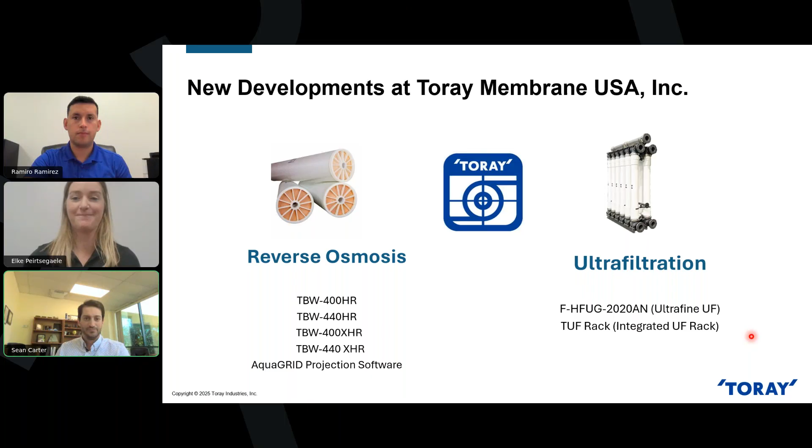As Sean mentioned, we're going to be primarily focusing on RO membranes today and the development that we've made in the technology here at Toray.

To kick things off, it makes sense to show what a traditional polyamide RO membrane looks like. Here on the screen, we have a cross-sectional SEM image of a polyamide RO membrane. You can see the 3 layers in the membrane. At the very top, you can see this very thin layer, and that is the cross-linked aromatic polyamide chemistry.

That layer is actually referred to as the barrier layer or the separation functional layer, and essentially it is responsible for rejecting the dissolved solids that are present in a feed water. So that is the membrane that is doing the rejecting.

That sits on a polysulfone support layer or inner layer, and that polysulfone layer is microporous and essentially serves as a support layer for that thin polyamide layer at the top. Then that sits on a non-woven polyester fabric, which is the thickest of the 3 layers, and that is known as the substrate that the membrane is cast on. That substrate basically provides the mechanical strength and durability for the membrane.

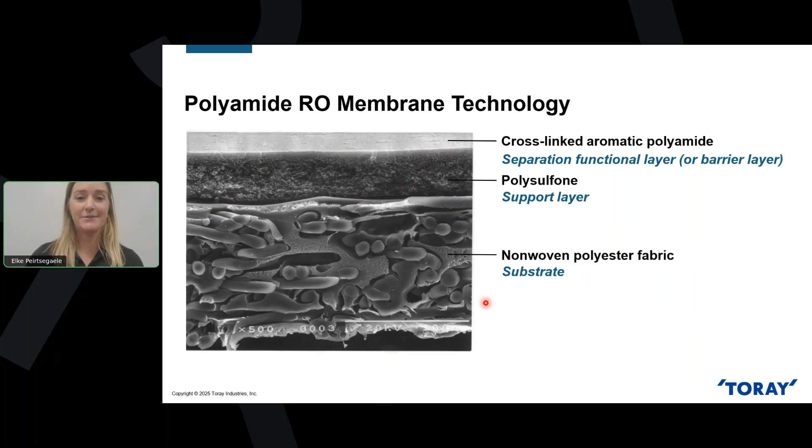So that's what a traditional membrane looks like. Now we'll talk about the things that we're looking for in an RO membrane as they're used widely to treat surface waters, wastewaters, etc.

When it comes to RO, we're always looking for a membrane that has reduced energy consumption, right? We want to lower that OPEX. We want a membrane that produces high quality permeate, right? We want to meet those permeate quality requirements. We want a membrane that's anti-fouling, and then we also want a membrane that has high durability.

Today we're going to focus on the first 2 here. We're going to look at how we can reduce the energy consumption of a membrane. In order to do that, we need to have a membrane that has higher flux or higher water permeability. One of the things we can look at in the membrane chemistry to achieve higher flux is the protuberance structure, and we'll get into that.

And then when we're looking at creating a high quality water permeate stream, we want to create a membrane with higher rejection. In order to achieve that higher rejection, we want to look at the pore structure within the membrane chemistry. So we're going to dive into those in a bit more detail here.

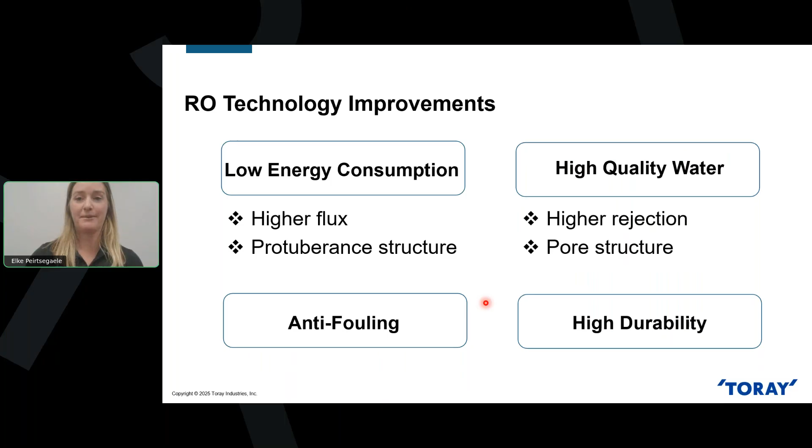As I mentioned, we're looking for a membrane that has both high salt rejection characteristics as well as high water permeability. In this graph, we're striving for this magic corner up in the top right, where we want a membrane that has high rejection, high flow. Traditionally, we've had to balance between the two characteristics.

Typically when you have a membrane with higher salt rejection, that permeate flow drops off, and vice versa is also true. When you have a low energy membrane, that permeate flow is higher, but that rejection comes down a bit. That's represented by this blue diagonal line here. So we're striving to get to this magic corner.

So how do we do that? On the right-hand side, we have a diagram showing the theoretical concept behind the membrane. On the left-hand side is what an RO membrane looks like today. These black lines represent the polymer chains, and you can see there's cross-linking there, but also some imperfections within that chemistry, and that creates these voids or pores.

For those charged ions present in the feed water, those get rejected pretty well by an RO membrane because that polyamide surface typically has that negative charge. But for neutral molecules like boron, silica, urea, those can pass through some of these voids. In order to improve the rejection of those neutral molecules, we need to look at that polymer cross-linking, improve that, and create more uniform, smaller pores to remove those voids. That's what's being depicted on the right here.

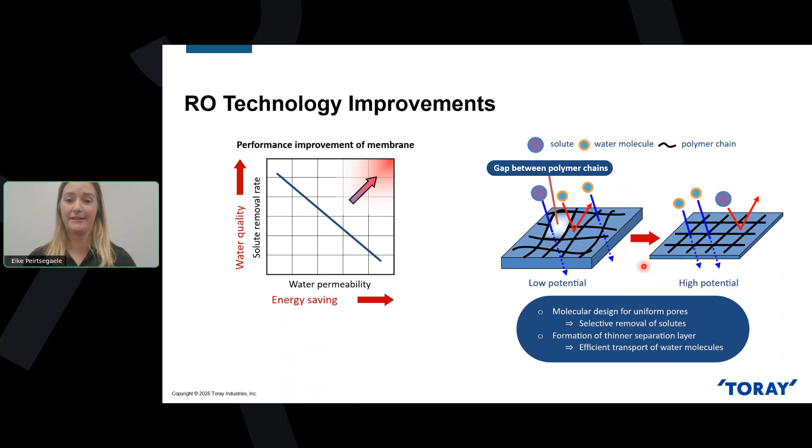Another thing we need to look at is how the structure of the membrane surface itself leads to water permeability. We'll look at that as well.

Going back to this SEM image that we showed at the beginning of the presentation, we're going to zoom in on that polyamide layer and see what we can do to get closer to developing a membrane with higher rejection as well as higher flow.

If we take an SEM image of the surface of the membrane, looking down at the surface of the polyamide membrane, you can see there's a lot of these that look like bubbles. These are the peaks and valleys of the surface, and each one of those peaks is known as a protuberance.

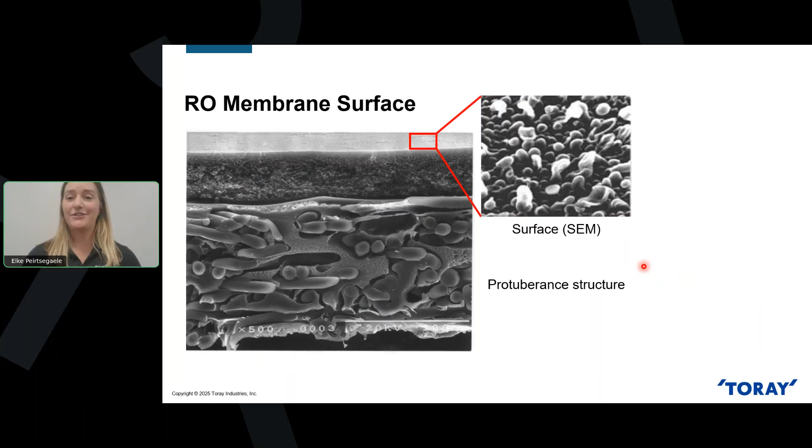We can also take a cross section of those protuberant structures, and we can see again the surface of the membrane has these ups and downs, the peaks and valleys, and we're going to see how these structures impact permeability as well as rejection.

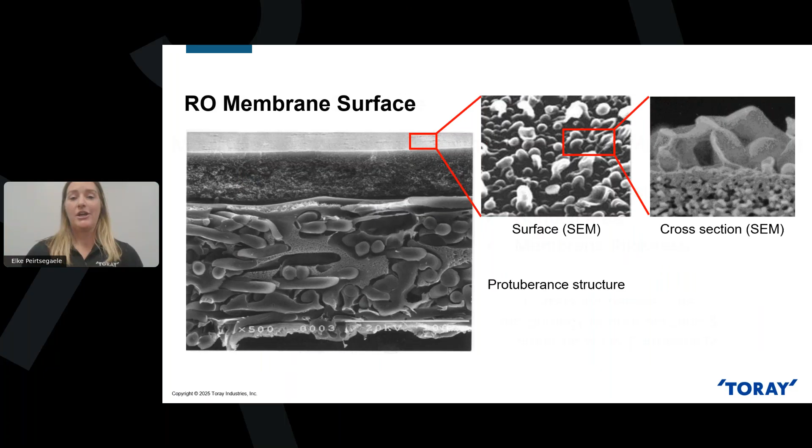By taking some TEM images, we can look closer at the protuberant structure and take some measurements. We can look at the surface area of each of the protuberants to understand how much surface area is at the membrane surface. We can also measure the thickness of this protuberance - you can see it's a little thinner here at the top, and then it gets a little thicker here at the bottom, so not super uniform.

If we measure these two things, the surface area and the thickness, we can potentially see what impact that has on permeability through the membrane.

We can see that relationship in this formula here - a diagram of that protuberance - and you can see that flux is proportional to surface area over thickness. So if we can increase that surface area at the membrane surface and make that protuberance thickness more uniform, we can essentially increase that membrane flux.

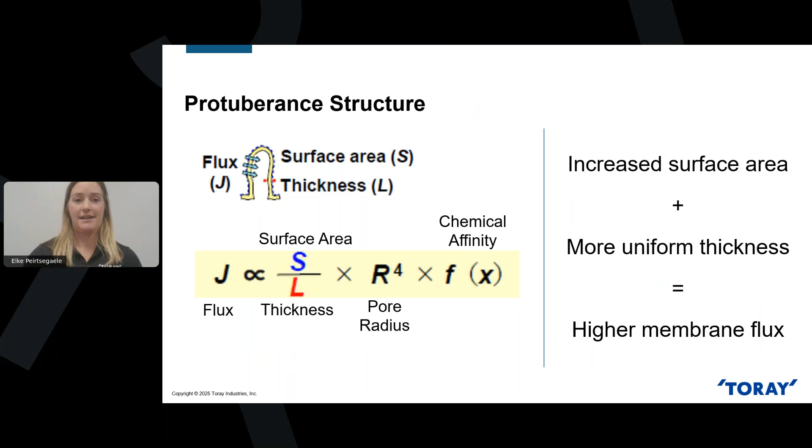So that is exactly what we set out to do. The first part was getting that data - we have a bunch of really expensive microscopes that allow us to take all these really cool images.

On the left-hand side, we have a 3D image of this protuberance, and it allows us to measure the surface area and look at the thickness of the walls of that peak. You can see this thickness isn't uniform - you've got a thinner wall here, but it's thicker over here, and that can lend to discrepancies in flux when looking at that specific protuberance structure.

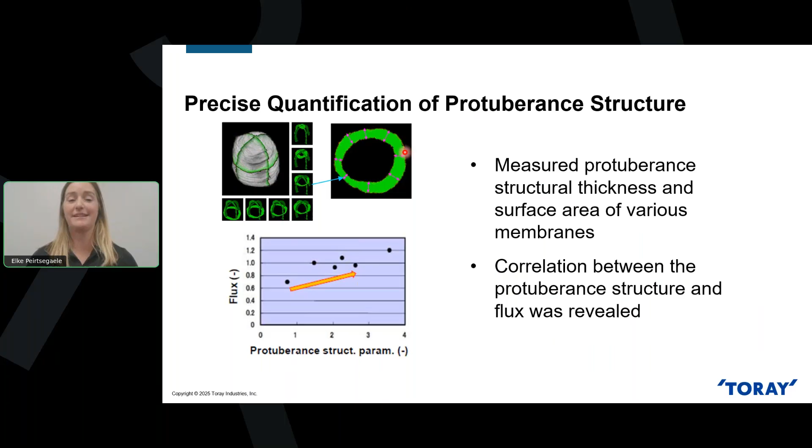By taking all these measurements, we actually realized that the surface area and the thickness of these structures does correlate to membrane flux.

So now it comes to how do we tailor that structure so that we can achieve that higher membrane flux. On the left-hand side is an image of a conventional membrane, and you can see that protuberance height on average. With the new membrane chemistry we've developed, you can see that protuberance height is much greater, and by increasing that height of these structures, we are increasing the surface area of the membrane, which as we saw in that formula, increases the permeability through the membrane.

Another thing is looking at the thickness of each of those protuberant structures. The conventional is in purple here, and you can see the distribution of thickness is quite wide - there's a lot of variance in the wall thickness. If we can hone in and get more refined on that distribution of thickness, we can get a more uniform structure, and that will also help us increase the flux through the membrane.

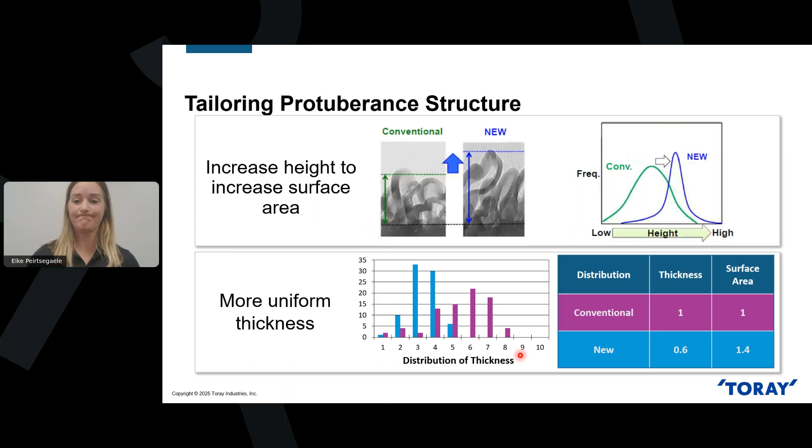So that is exactly what we've done. We've talked about the permeability of the membrane and improving that, but we also need to talk about how you improve rejection, specifically of these neutral molecules that slip through these voids in the polymer chain or the cross-linking. Again, here's an SEM image of a conventional RO membrane.

That's where those neutral molecules like boron, silica, and urea will pass through those voids. So how can we improve this? How can we essentially ensure that those voids are gone? We can improve the cross-linking.

If we improve the cross-linking to create uniform, small pores throughout the surface of the membrane, we can reduce the amount of large pores that are present, and that will improve the rejection of those neutral molecules.

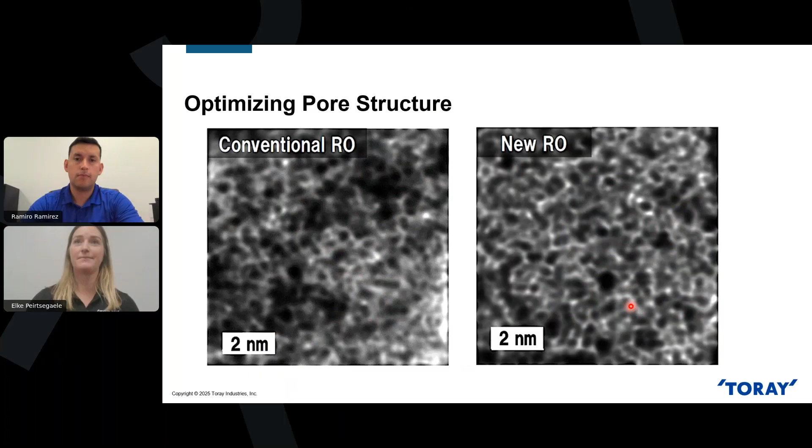Yeah, thank you for that detailed explanation of the technology, and I want everyone on the call to keep that in mind. We're going to talk about the real life application and introduce the TBW membrane, but just keep in mind that comes through a lot of efforts and actual improvements in the technology as described by Elke.

So what's the importance? What's the sense of urgency in improving the technology? And that's because the market demands it. For us, we've had improvements over the years in the removal of dissolved ions, something we do very successfully, but the passage of neutral molecules is ever pressing with water scarcity and just in the spirit of optimizing technologies.

It's incredibly important. So some of the most common neutral molecules that we're going to be discussing, and that we see the need for efficient removal of, are silica, boron, urea, and PFAS, which I'll explain towards the end of the presentation. So one of the origin stories, so to speak, for this new membrane is the ultra pure water market.

Semiconductors, we all use them, right? They've become a core product of society today, and it's a very, very high efficiency process. If anyone here has ever been to one of these facilities, you'll be amazed by the level of detail and the redundancy they require to basically achieve the most pure water possible. That's what they're trying to achieve. So they're stretching really the theoretical limits for ultra pure water.

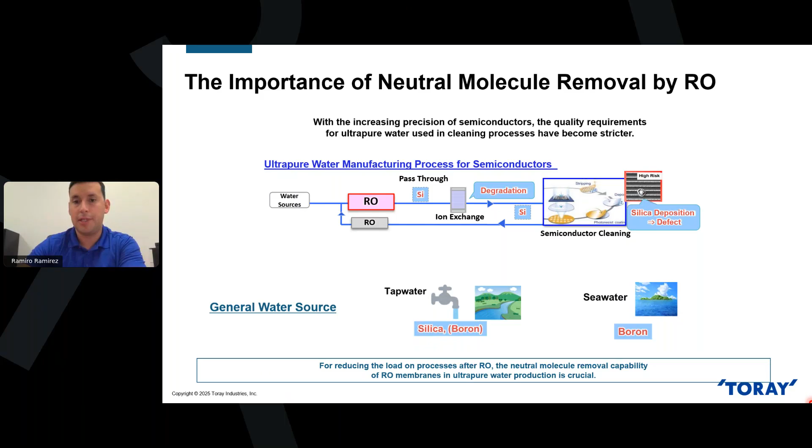So oftentimes, these high-pressure steam turbines are monitoring for silica consistently and trying to achieve levels below 5 to 10 parts per billion. Typically, you have an RO system that's going to be doing a bulk of the work, and then you would pass that through some kind of polishing step, whether that be a resin, lead lag, EDI or CDI technologies, and extending the regen frequency is really important.

So these resin systems, for example, will typically break through on silica. So they'll monitor the conductivity, they'll monitor the silica, and as silica is easier to pass through RO, it's actually easier to pass through resin as well. So oftentimes they'll be monitoring the concentration of silica, and when they reach a certain level, 5 to 10 parts per billion, is when they'll have to trigger a regen. So the more we can take out with the RO, the more risk you're managing, and you're also going to get that investment back in reduced regen requirements.

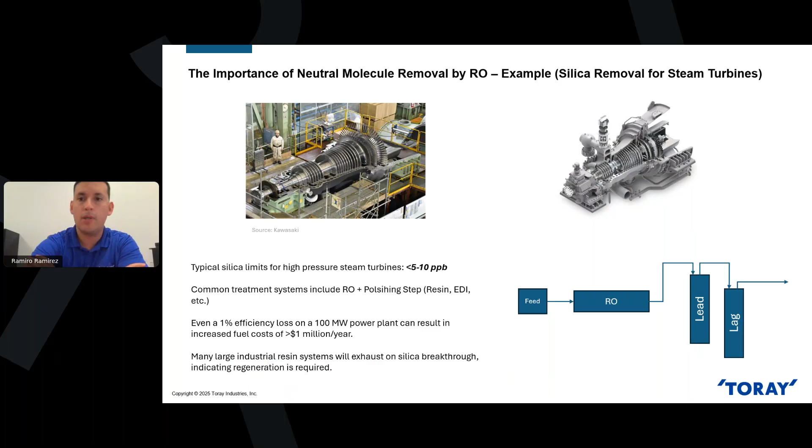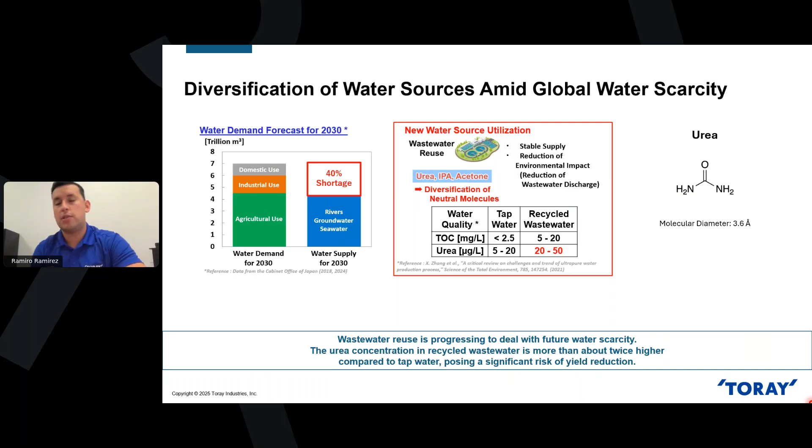So urea is another constituent of concern. You can get it from natural processes, from agricultural runoff. It can leach into the groundwater, and the molecule itself, again, is neutral, and it's very small in diameter. It's not that much larger than water. So as Elke was explaining, any imperfections or gaps in the cross-linking are opportunities for that urea to come in. So we want to make sure that we're optimized to remove as much urea as possible, especially these days as we're approaching more and more water reuse projects. So again, we just want to reiterate the need and the urgency to optimize that system.

So the technology that Elke explained at the beginning of the presentation has a name. That is the new TBW series. We're very excited as a company to be releasing these products. These products are officially available for release, so you can contact myself, Elke, Sean, or your local Toray rep, and we're happy to provide you information on the membrane. You can download these data sheets on our website.

So if we take a closer look, we have two membranes available in that product category. We have the one on the left, which is the TBW HR, and the one on the right, TBW XHR. I'll explain the differences here in a bit. These are available in 400 and 440 square foot versions. The one on the left, you'll see the test conditions resemble more a low energy brackish membrane.

And the one on the right, we're at a test condition of 290 PSI for single element wet tests. So it's a little bit elevated, not quite in between a brackish and a seawater, but certainly filling that space. So again, when it comes to membrane selection, are we trying to take advantage of a low energy or a high rejection? We can balance that case by case to figure out if the HR or the XHR is a more appropriate membrane for that particular job.

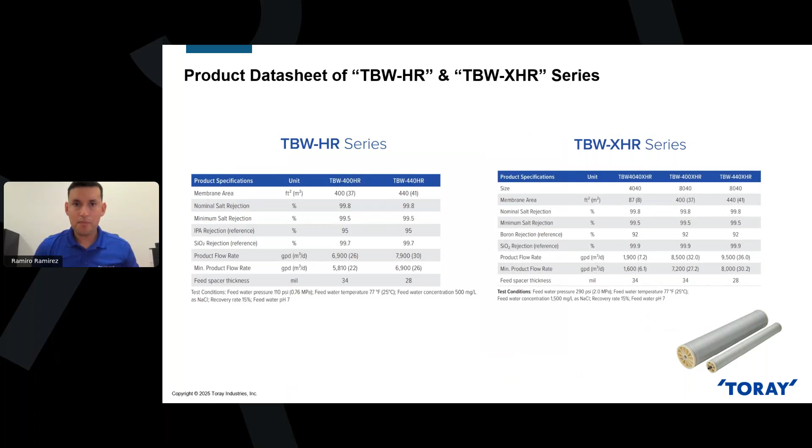For anyone here who's worked in the membrane space, you may have seen a chart like this. This is a chart showing the difference of the A and B values. There's a lot to go over here, so we'll take it step by step. Just as a refresher, the A value, plotted on the x-axis, is the water mass transfer coefficient. This defines the rate of water transferred through the membrane. Generally speaking, you want a high A value, towards the right of that graph. That means you're able to achieve a specific water flux at a lower operating pressure.

Plotted on the y-axis, you have the B value, which is the salt mass transfer coefficient, and this is the rate of salt diffusion through the membrane. Again, generally speaking, the further you go down on that graph, the better salt rejection you're going to achieve. So in a perfect world, you're going to generate a membrane that's at the bottom and the right side of that graph. We have 4 elements plotted here.

If we focus on the 2 on the right, the element plotted in the orange line is the TBW 400HR, which again is at those lower pressure conditions. Right next to that in the gray is the TM720D 400. For those familiar with the Toray membrane nomenclature, that's our high rejection brackish element, which has been a flagship element for Toray, something we're very proud of, with thousands of successful applications worldwide.

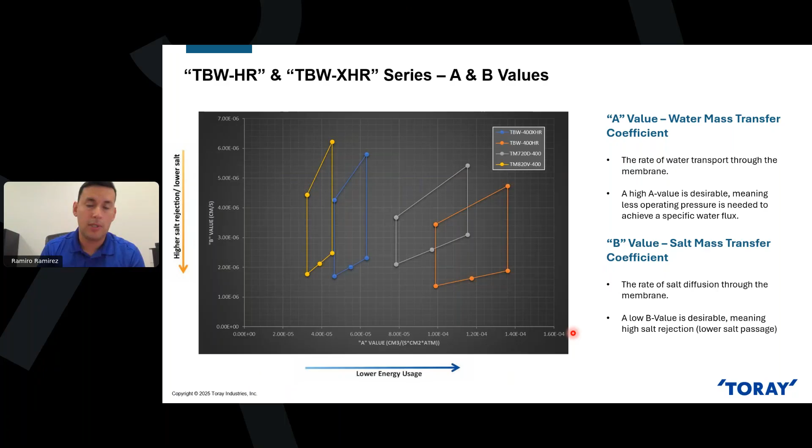So if we take a look at the published information, to no surprise, the collective efforts of the Toray R&D team have paid off, right? So looking at this here, we're looking at the boron rejection of a conventional membrane, as opposed to the new ones that we're generating. So this one here is specific to boron. The test conditions in this particular example are a little bit different than the ones published on the data sheet, so we can go through those details case by case with your local Toray rep.

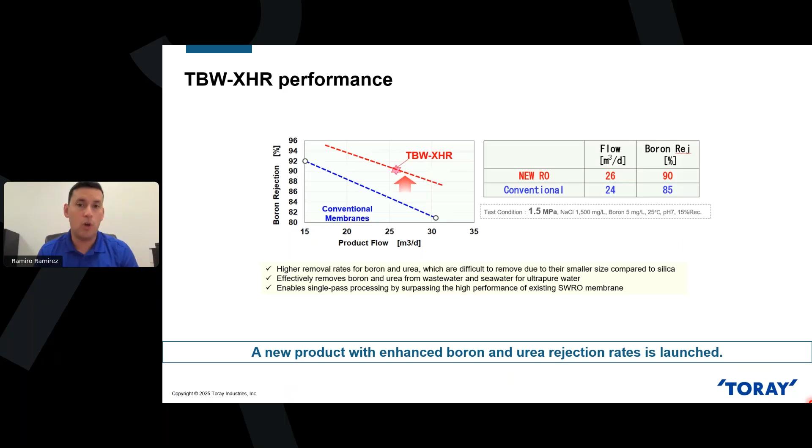But the difference of 5% here in this particular example may not seem like quite a bit, but at this point we're talking orders of magnitude difference in what you're projecting in your permeate. So depending case by case, in certain areas where you may have been expected to do a double pass system or get creative, we are opening the door to potentially getting away with a single pass or maybe not dosing as much caustic in the second pass. There's a lot of different groups here that we can explore case by case, that we can open up with these new membranes.

Just following this trend here, looking at a couple different examples. So here on the left, you can see the difference in salt rejection, a conventional membrane in the blue line versus what we're able to achieve with the new series of membranes. On the right, we're seeing a silica rejection value. So for the XHR, a nominal rejection for silica is 99.9%, which is significant. Like I said, it may not seem like a big leap from 99.7, but when you actually pencil out the calculations and take a look at your projections, the improvements are notable and exciting.

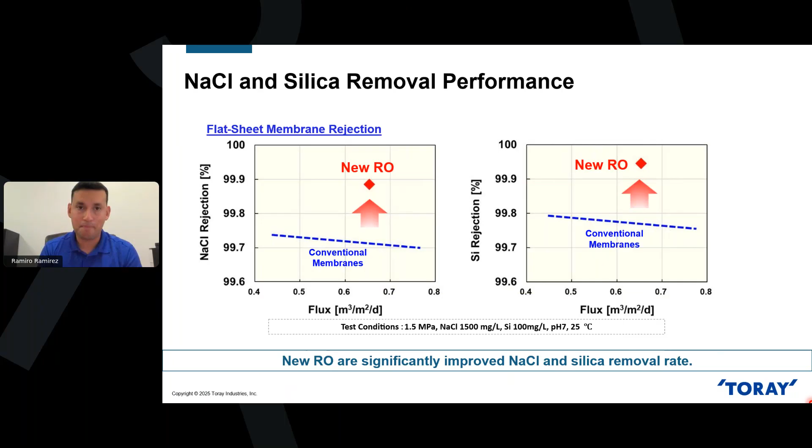Just going through a couple other ones here. So we talked about boron and urea and how difficult they are to remove for the size of the molecule and for the fact that it's neutral. So again, this is just to demonstrate the data that we've acquired with these new membranes and how they compare to what we're used to seeing on the conventional side.

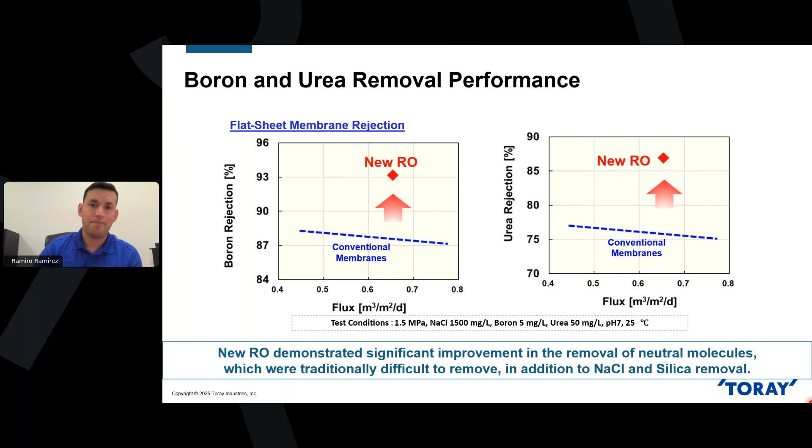Again, just wrapping up a couple of those here. So acetone and IPA. Acetone is not something you likely want to introduce in your system, but it's a good indication and what we use as a benchmark for the removal efficiency of neutral molecules at varying molecular weights and molecular sizes. So again, the trend we're seeing here is improvement across the board. It can vary depending on which constituent you're trying to remove, but again, Elke's explanation is so important because it's providing a technical background as to why we're seeing these new values and an explanation as to how we're able to achieve these improved rejections.

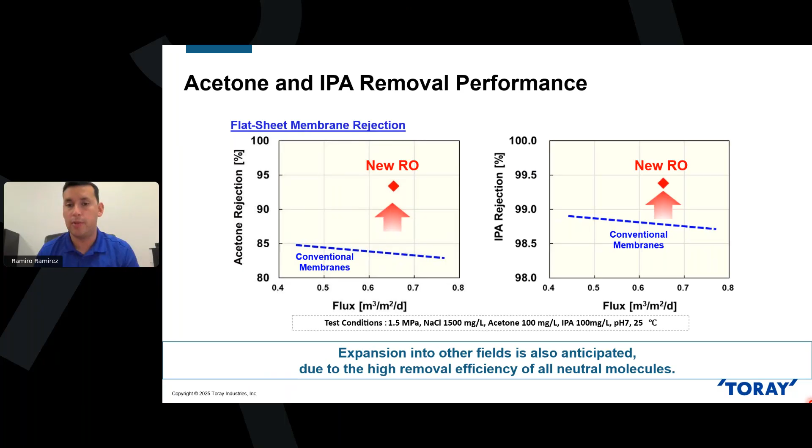One other important thing that we want to chat about here is PFAS as well. So PFAS, I'm sure everyone here on the call has come across the term. Can you go back just 2 slides? One second here. Just want to go back.

There we go. So PFAS is per- and polyfluoroalkyl substances. PFAS is the blanket term. Many of you might know them as forever chemicals. These are chemicals that have been in production since the 1940s. We've all taken advantage of these chemicals through nonstick pans and the materials to make your clothes waterproof. They've been used in military applications across the board. And as of the past couple of years, we're unfortunately coming to terms with the fact that these are persistent and have been linked to a wide array of health consequences for humans, right?

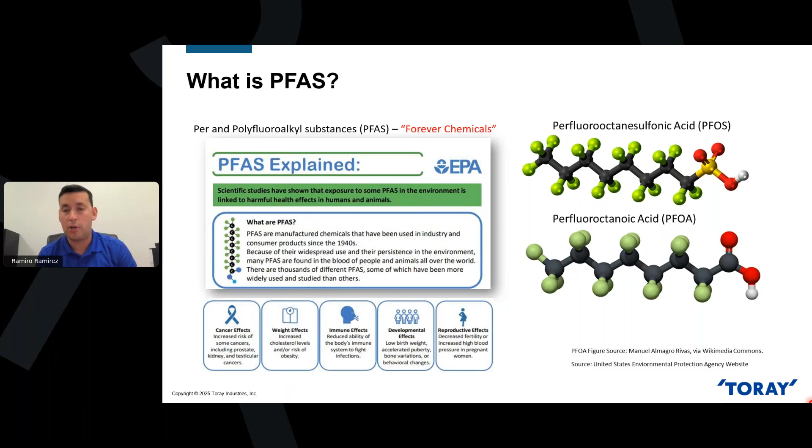So to say that they're a constituent of concern is old news. We've been struggling with the removal of these. It's kind of tricky, right? Because it's not a one size fits all. There's different families. If you see in this diagram, based on the amount of carbon chains, they can vary in length. There's the PFOS, which typically has a sulfonic acid functional group. And you'll see the ones on the bottom, PFOA, which use carbon chains, and then they'll have a carboxylic acid group. So they'll vary based on size. The functional groups and the surface charge are different based on which one you're looking at. So the removal of these has been historically challenging.

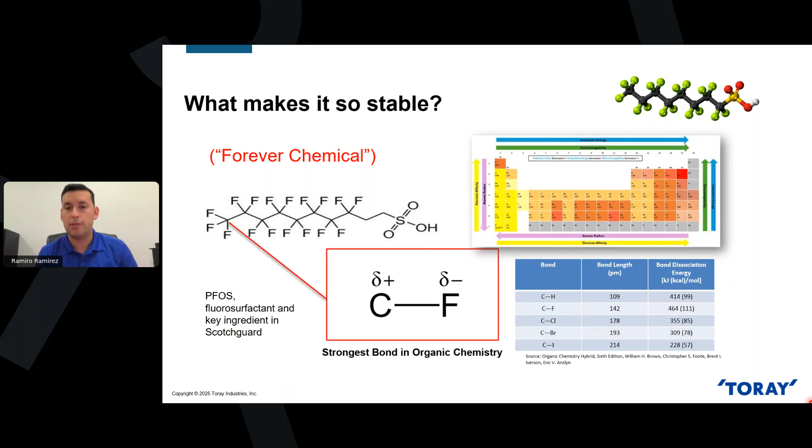Again, a little bit more background on PFAS. They make use of a carbon-fluorine chain, which is the strongest bond in organic chemistry. So to be able to just destroy them in water or degrade them is not particularly trivial. They're incredibly difficult to break down. So our tactic is to effectively use reverse osmosis to concentrate that, minimize it, put that all in a bucket, and then deal with that concentrated solution more effectively.

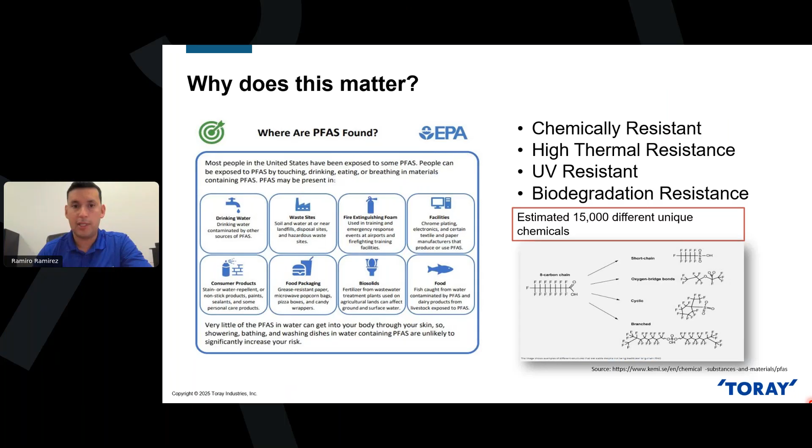Really that uniformity that we're able to achieve in the TBW series is going to be able to more effectively, non-selectively remove these constituents from a water source. Again, if we take a look at the different categories of chemicals here, we'll notice that they're all of different molecular weights. So with us being able to produce a membrane that is more consistent in the level of cross-linking, better at rejecting PFAS components of all molecular sizes, we're able to more confidently, more accurately, and more efficiently remove these families of products.

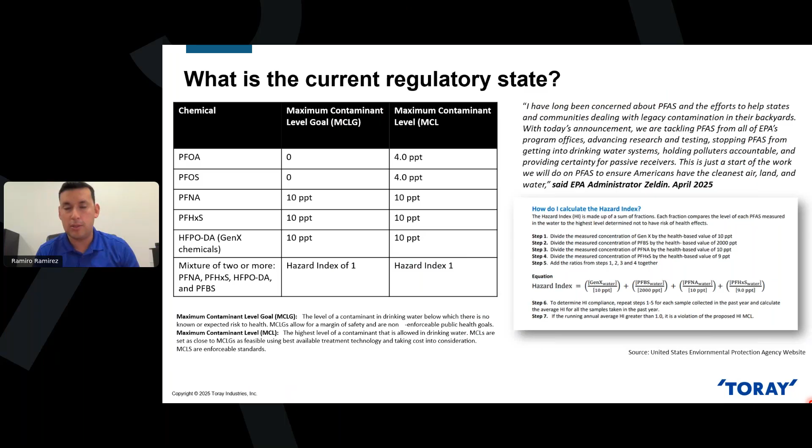But needless to say, the EPA has released these guidelines. We're talking part per trillion levels at this point. There are requirements to monitor and test for PFAS in potable water sources. And any sites that are seeing elevated levels of PFAS are going to be required to incorporate some kind of technology to get these below the MCLs, and those timelines have been established. So the time is now. It's not something that we're speculating at this point. There are actual regulations that have taken place. So we can expect to see these projects come to fruition in the coming months and years.

As far as technologies that we have to deal with PFAS, we have granular activated carbon, GAC, we have ion exchange, and we have reverse osmosis as 3 common ones. Each of them, in my opinion, has a pro and a con, depending on what type of water you're trying to achieve, the flow rates. Do you have long chain? Do you have short chain? You might use any one of these technologies or any combination. GAC is typically pretty effective at large flow rates, but it might be challenging to dispose of once you saturate it with PFAS. It's also effective at removal of certain chain sizes more than others. Ion exchange has a nice removal capacity, but it's an expensive product to produce.

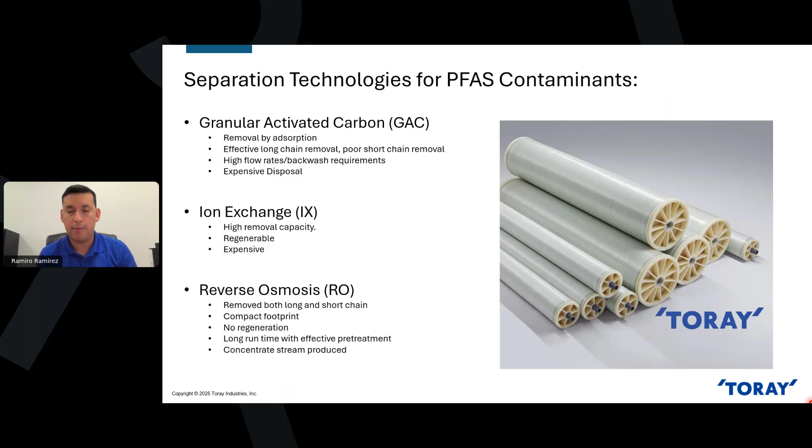RO, which is what we can speak to with a little more clarity, is very effective at both long and short chain removal. It was so before, and it is even more so now with the new technology. It has a compact footprint, no regeneration, but you do have to find a solution for the brine stream, the concentrate stream. That's historically been a little bit challenging with a standard UF/RO system. Very effective at removal, very effective at concentrating. So if you're operating at a very high recovery, you can funnel all that PFAS and concentrate it into as concentrated a reject stream as you can achieve. But the question remains what to do with that stream.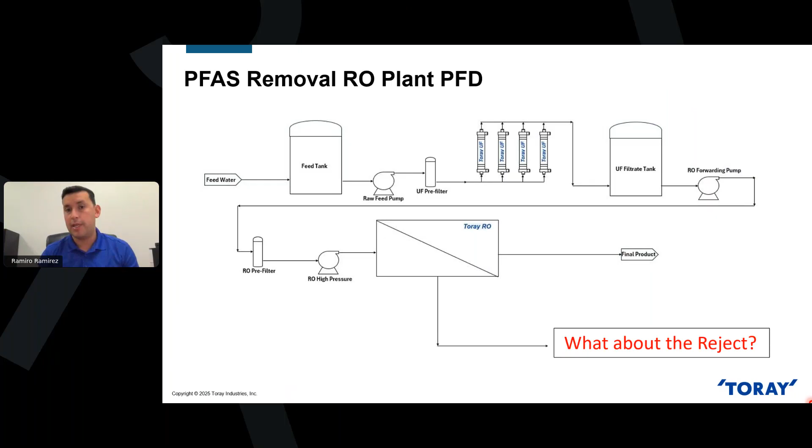So again, this is a very high level overview. If any of you have specific projects or want to talk about these concepts in more detail, we're happy to, but there are a myriad of different technologies that we can utilize to dispose of that. That has historically been a challenge, but we do have avenues for that, and making use of a TBW style membrane, you're going to be able to further improve the concentration of that and generally just optimize your system.

So the last thing I wanted to touch on before we end the webinar is our AquaGrid software. This is our new version of the Toray membrane projection software, which is available to download now. This has been years in development, and we're excited to have it released. For anyone familiar with the Toray product line, you may have used the DS2 software in the past. Phenomenal software, but as you may have noticed, a little bit antiquated in its user interface.

So we've upgraded that. I would encourage everybody on the call here to download it and reach out to myself or Elke or your Toray rep. There's a lot of really interesting tools.

You can do batch calculations, so you can do multiple iterations of a design in the same projection. You can do your min and max temperature all on the same projection, so it's going to save you quite a bit of time. For me, it's kind of similar to an Aspen HYSYS software if you've used that in the past. So you have the ability to basically design the RO system, and you can make use of incredibly complex models.

If we go back, we'll kind of look at the data. Again, this will depend on the water, the operating flux, the recovery - there's a number of factors. So just understand the values being reported here are for single wet test conditions, which are defined below.

One question that came in that I can answer as the moderator: someone is asking if we will be sharing the presentation, and whether you will be able to access this webinar later if you missed parts of it. You will be given a link later that you'll be able to use to go back and access this.

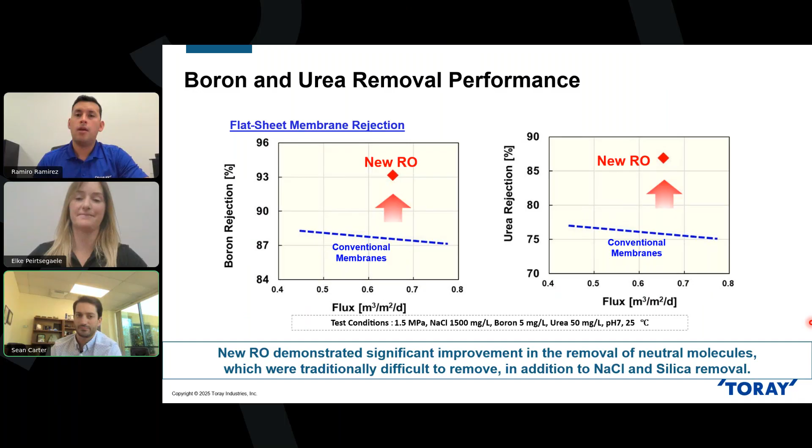Yes, so if you go to water.toray, or just Google Toray membranes AquaGrid, you will see some YouTube videos and training videos. There's a manual you can go through, and a video that's maybe 5 or 10 minutes long. So go ahead and take a look at that.

What I would encourage you is go ahead and download it, play around with it, spend 20 or 30 minutes just familiarizing yourself with the interface. But I would highly recommend reaching out to your Toray rep - I do these trainings very regularly. You can easily spend multiple days going over anything from concepts of design.

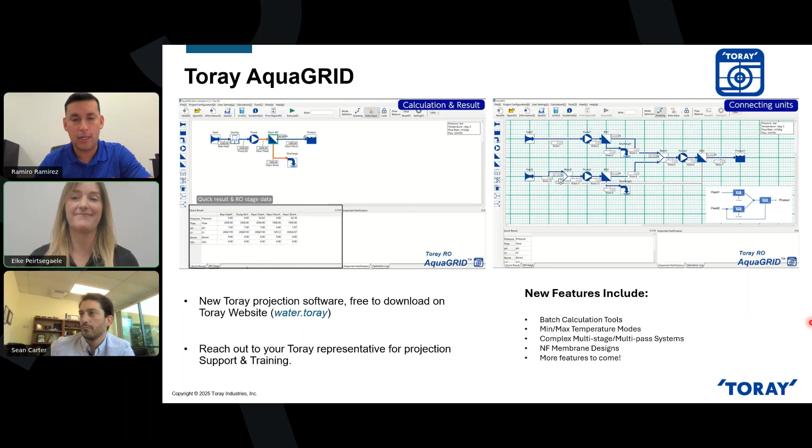If you want to go through design concepts, that's a little bit separate from AquaGrid, but we can go through some examples and let you know how we go about certain projects. If you're an expert in design and just want to go through the interface and the batch calculation tools, they're like any software - Excel, PowerPoint, whatever - it takes some time to get familiar. There are a lot of neat tricks that may not be completely apparent if you just open it.

So go ahead and reach out to myself, and if I'm not your primary, I'll put you in contact with whomever is. The Toray team is very technical - we all have an engineering background, and we have an applications team as well. We're more than happy to do that with you guys on an individual basis. We'll share links over time, so keep an eye on emails from the Toray group for group webinars. But in my opinion, it's better to cater it individually based on your level of expertise with design and what you're trying to achieve - whether it's a complete design course or just where to click to find the buttons, we can tailor that to your specific needs.

I will add one thing to what Ramiro said too. I've had some customers say that when they try to download the program, they have to bring in their IT team to allow for the download. So just a heads up, if that's the case for you, make sure you have your IT crew handy so that you can actually download the program.